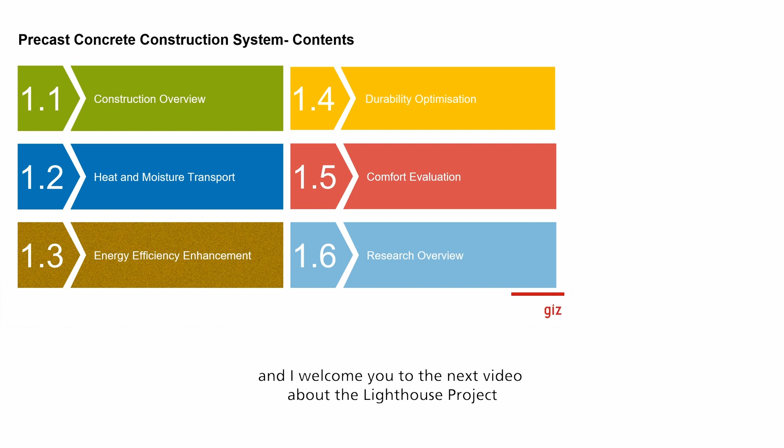Welcome to the next video about the Lighthouse project in Chennai, where we will discuss durability optimization. First, let me come to the basics of durability. What does durability mean, and how can we evaluate the durability? Then later on we will look into the possibilities to really optimize the durability and how to increase the lifetime

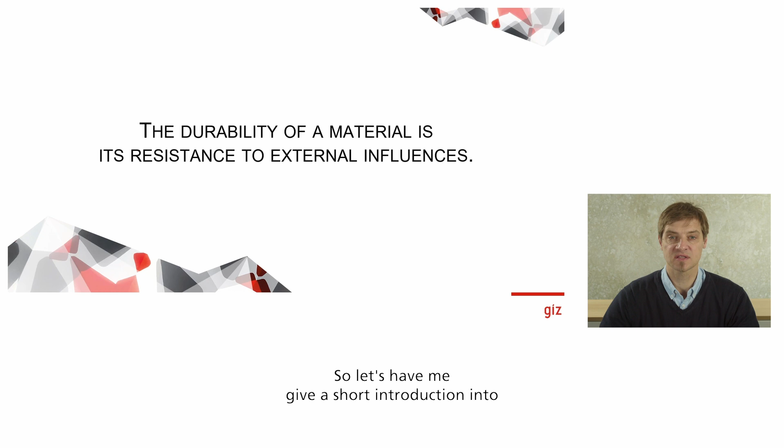of the construction. With that, I would like to start with the first thing about the optimization of the durability, which is the durability itself. Let's look at the influence of the climate on the durability of the construction. When I say we will look at the influence of the climate, I think we have to go one step back and firstly look at the definition of the durability itself. So let me give a short introduction into durability. What is durability?

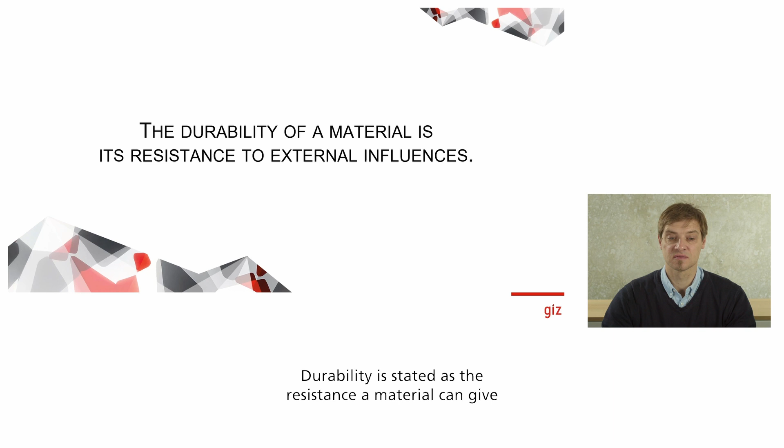Durability is stated as the resistance a material can give to an external influence. And the climate is just one of these external influences, but we will look at this specific influence. So let's have a look at that: the external influence, the climate. As you know, the climate everywhere on Earth is different. So we have to look at the location of our construction site and see what kind of climate is in that area.

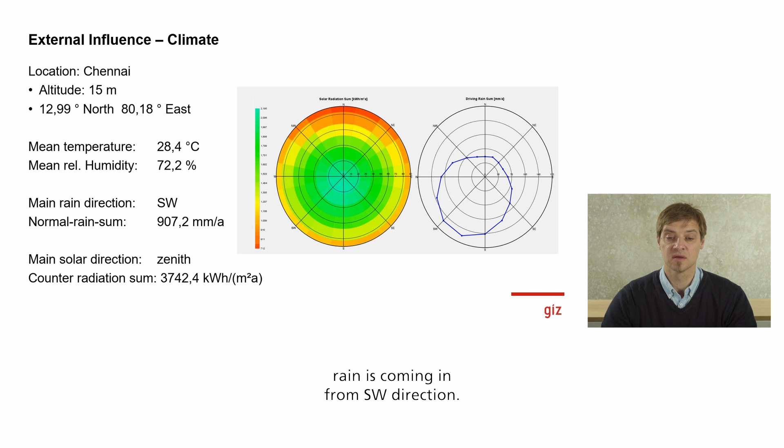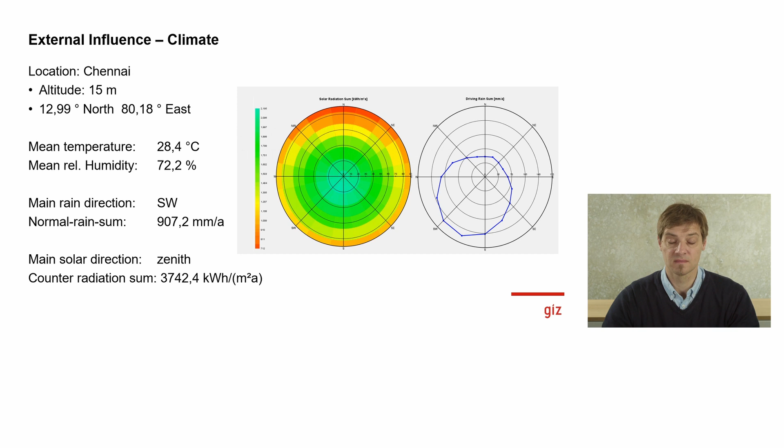On the right hand side you can see the solar radiation, the colorful plot, and from which direction the rain is coming in. The main rain direction is southwest, which means we have to look deeper into this direction especially. The second thing that we have to look at for durability is the material itself, because we said durability is the resistance of the material to the external influences, in our case the climate.

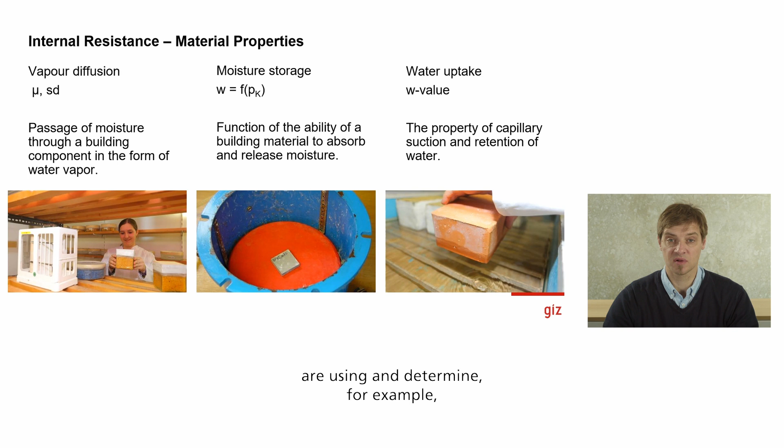The material properties can be determined by lab testing. So we can do a lab test on the material that we are using and determine, for example, the vapor diffusion, the moisture storage, or the water uptake. These material properties are especially for moisture and moisture transport, and also water and water transport within the material, as we know that water is quite a problematic thing in durability. If there is too much water inside a construction, there can be durability loss or resistance loss. If there's too little water in it, the same can happen.

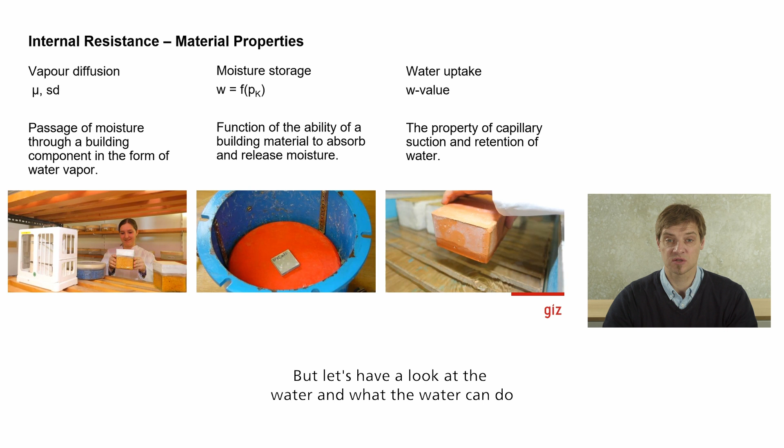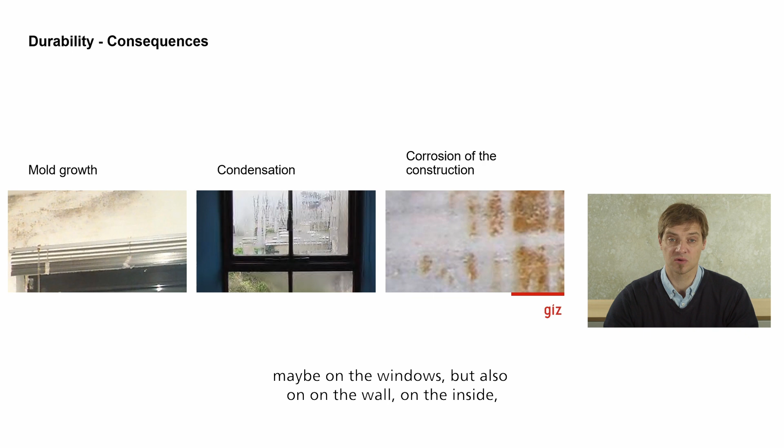But let's have a look at what the water can do within the construction if there's too much of it. The consequences, if we are not looking at that, are, for example, mold growth on the inside surface or sometimes also on the outside surface. We can see condensation on the inside, maybe on the windows, but also on the wall, on the inside but also on the outside. And this can also happen within the construction.

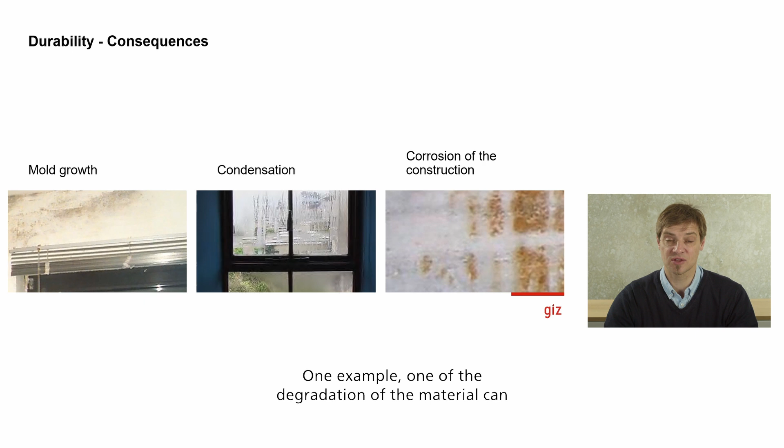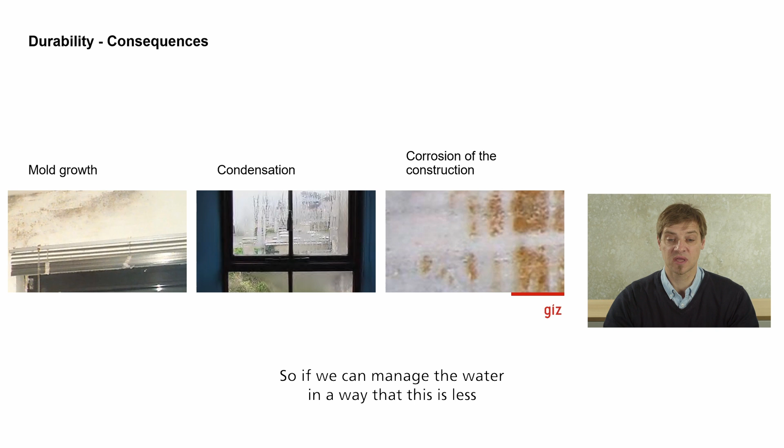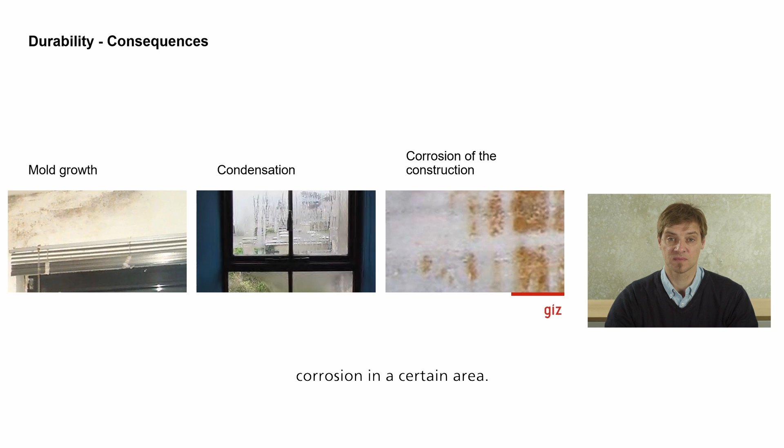If that happens, there is a possibility of degeneration of the material itself, which then leads to lesser durability of the material. One example of the degradation of the material can be corrosion, as you can see in the right hand picture. Corrosion is also introduced by water. So if we can manage the water in a way that it is less applicable to the material, then we also can manage corrosion to a certain extent.

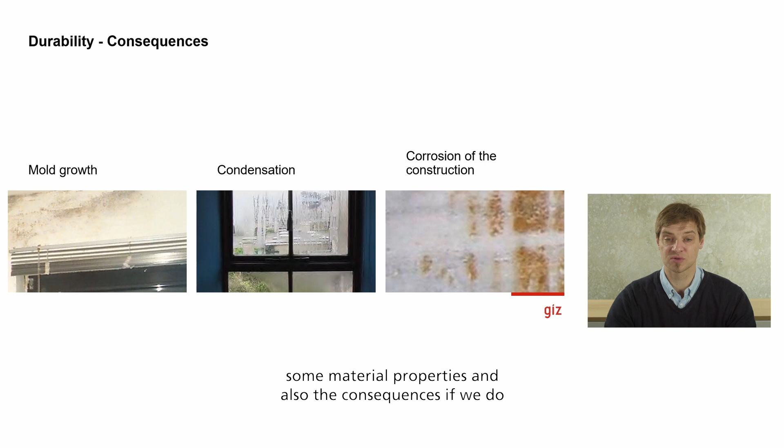So as we have now seen external influence, the climate, the material resistance, some material properties, and also the consequences if we do not look at it, or what can come out of it, the next step then would be to look into the durability evaluation methods. How can we go from the point that we know there is something happening to what is happening there? What can we do? What steps are to be taken?

One of the steps that we are doing is we evaluate the materials and the systems. We can do that in different kinds. We can do that, for example, for fully fledged systems in some kind of field tests. I have provided you a picture of some field tests where you can see different wall types with different insulation, but also different materials, where we introduce these materials to a harsh outdoor weather condition and see what is happening over the years. We measure it and then we recalculate it.

And then on the second step, we also do lab tests for the material itself. So in order to know the material properties, we can look into these materials by measuring them on the different scales in the laboratory. So we gain knowledge about the material and we gain knowledge about the systems in terms of their durability. This is one step, mostly the first step to gain knowledge more about the materials and the systems itself.

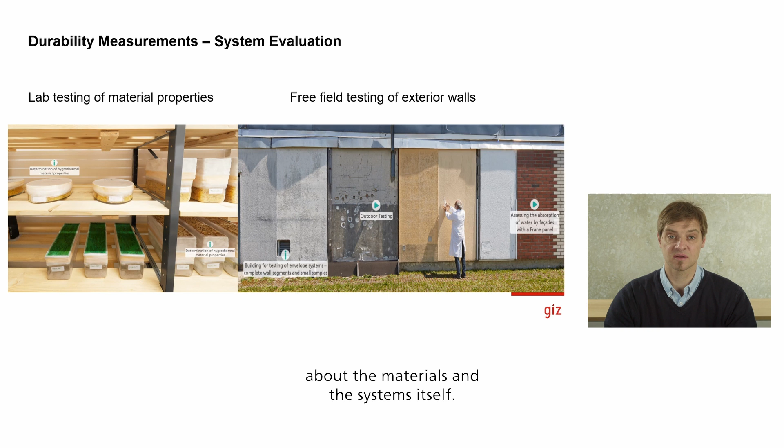The second step then would be to calculate what is happening, because durability is a long-term word. So it's not just for today, and will not look at things which are just from yesterday, but we look at things into the future and we have to pre-calculate what could happen. So what we can do is we can calculate the moisture content within a material, as you can see it on the left-hand side. We can do that by arithmetical evaluations of the durability. This is one method which is very vague, but on the other hand, very fast.

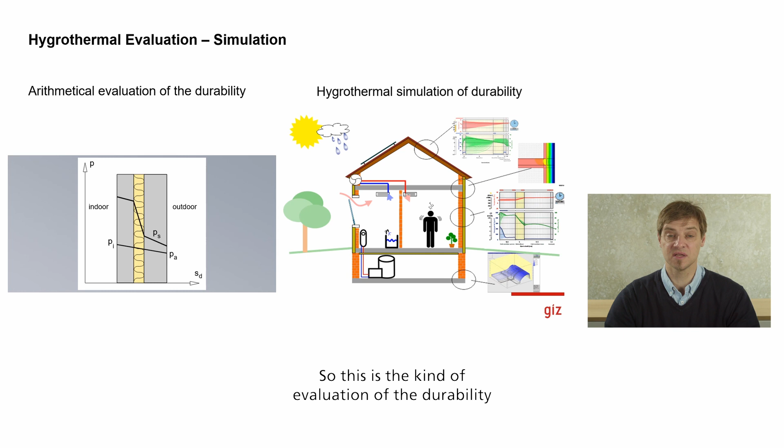And then we can do hygrothermal simulations of the durability. So we can model the system, we can model the material, and we calculate what is happening in the future, what is happening with the moisture in the material. And with that, we can gain knowledge about the moisture content within the material, and we then also can gain knowledge about the durability aspects if we know the model well. So this is the kind of evaluation of the durability through hygrothermal evaluation.

The next step then would be to look into the durability optimization. So we do have some kind of material. In your case, I have looked into the precast concrete construction that you have, and we go into it and look what we can find out using the hygrothermal durability simulation in that and how to optimize that.

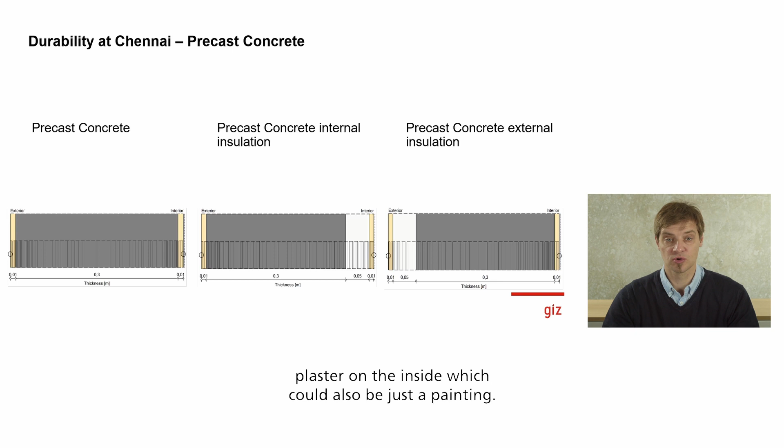First, I would like to show you the first step. So on the left-hand side, on the bottom, you can see a rough graph of the material. So we have on the left-hand side a plaster, we have the concrete block itself, which is the precast concrete, the material you're using with the material properties I have shown you in another video. And then on the right-hand side, we also have a plaster on the inside, which could also be just a painting. And I have then introduced some optimization possibilities.

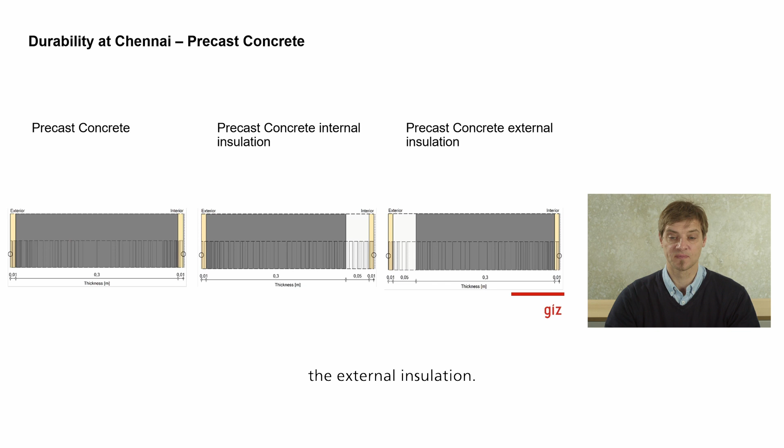We have talked about these possibilities, or we will talk about these possibilities in another video, where it's about the energy efficiency enhancement. So I have introduced an internal or an external insulation, which you can see in the middle, the internal insulation, and on the right, the external insulation. And what I've done now is I've pre-calculated that with the hygrothermal simulation in order to see how the moisture content within that material will be in the beginning and also in the end of the calculation, and I have calculated over 10 years.

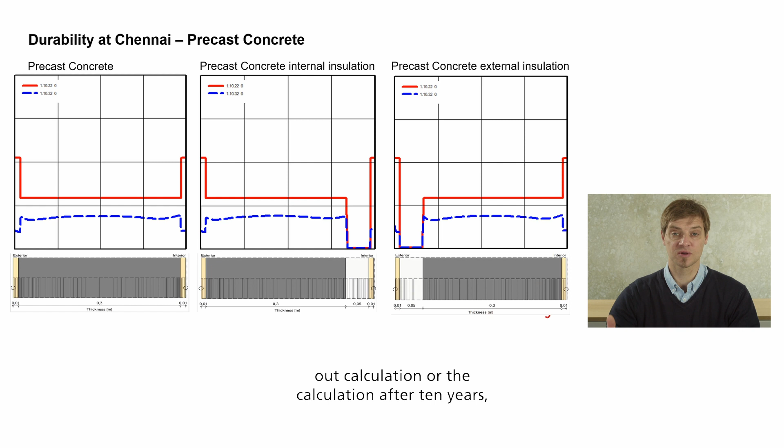And what we see is that in these graphs that are implemented here, the red line always is the starting point. This is normally the basic moisture which is in the construction, which is normal, and it should dry out in some kind. So the blue line, which indicates the dried out calculation or the calculation after 10 years, this blue line should always be below the red line.

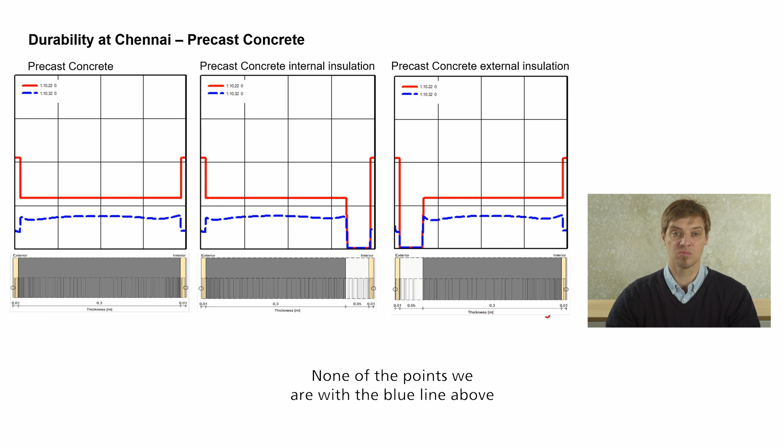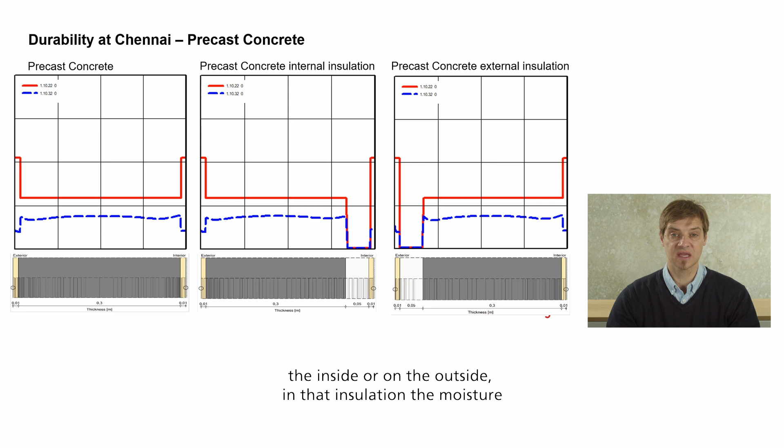If we look at these graphs, we can see that from the left to the right, it's always alike. So on none of the points are we with the blue line above the red line. What we can also see is that by introducing the insulation on the inside or on the outside, in that insulation, the moisture content is quite low.

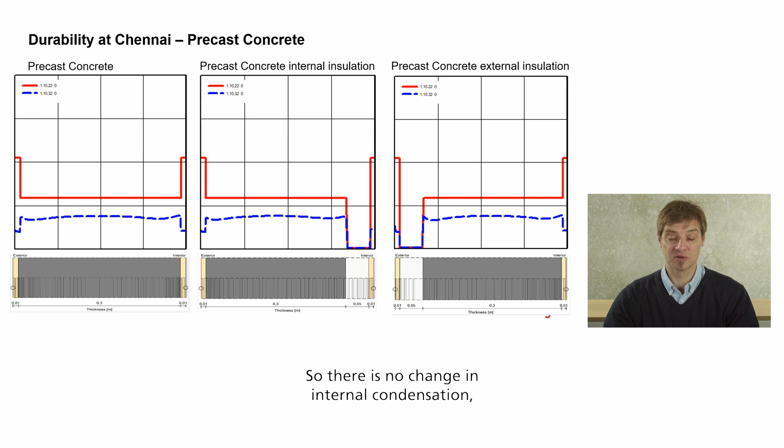But we can also see, if you have a look at the level of that moisture content, it's more or less the same in all the constructions. So there's no change in internal condensation, in internal water content using an internal or an external insulation. So there's no enhancement, you can say, in terms of durability looking at that.

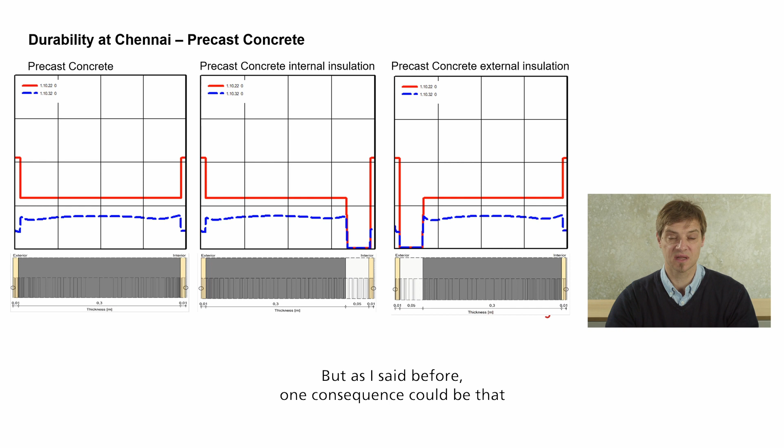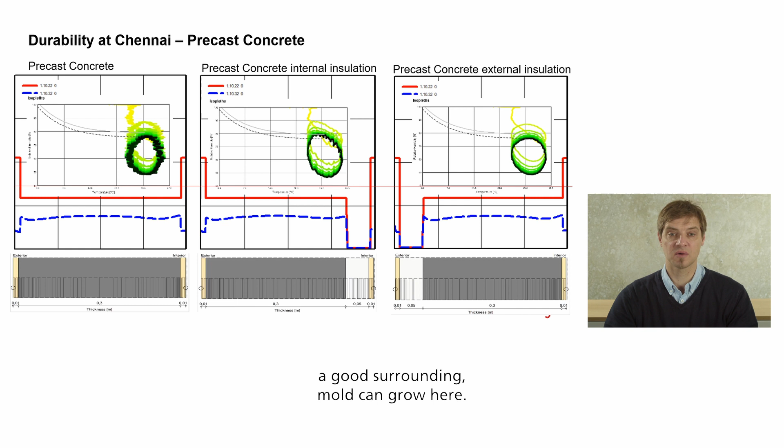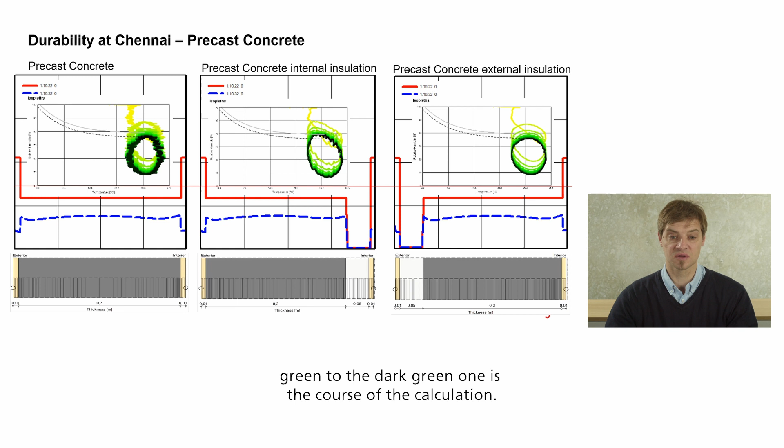And what we see if we calculate out of that measurement and out of the calculation I've done before, these graphs that you can see here, and each dot you can see from the light green to the dark green one is the course of the calculation. So if the light ones are at top and it goes down below that dotted line, everything is fine.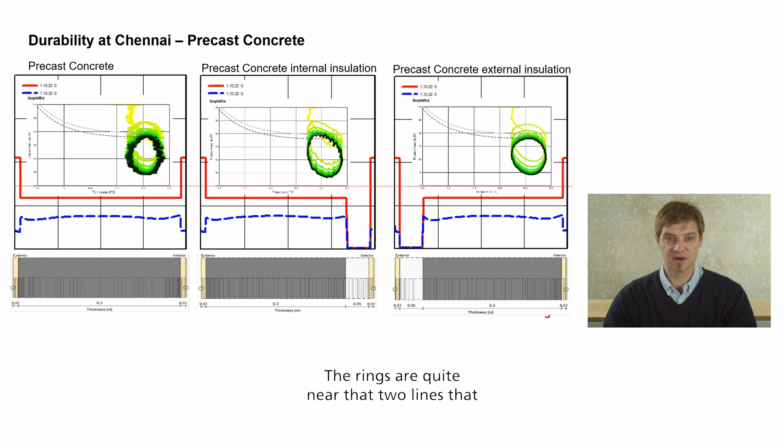And then you can see a circle which is black. This is the final state of that material. So if that final state is good, in the end everything is good, so we do not have to do anything in that area. What we can see is that with all the possibilities, no insulation, internal insulation and external insulation, the rings are quite near the two lines I've described before.

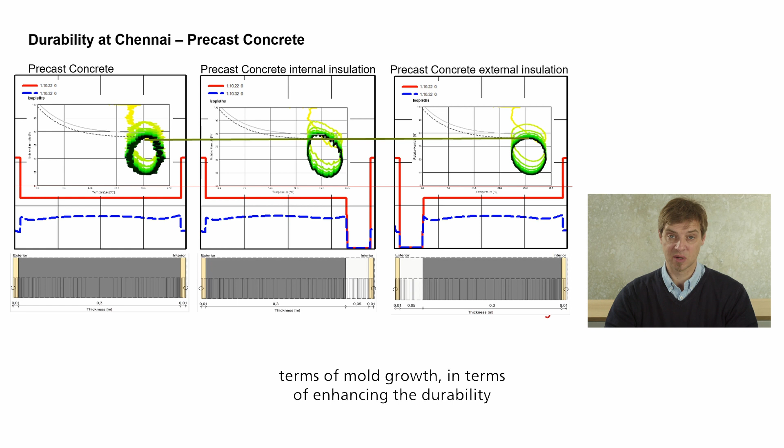If we compare these, and I've done that with this horizontal line, you can see that the best possible thing in terms of mold growth, in terms of enhancing the durability about mold growth, is the right-hand side, because here we are below the dotted line and we have no areas where we are above that dotted line.

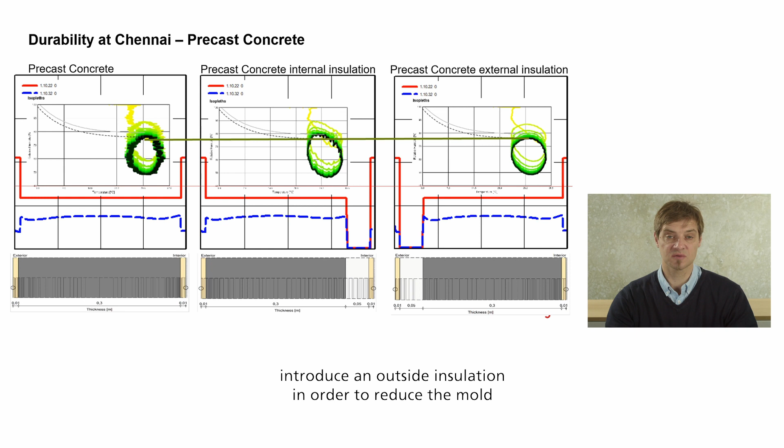So we can say there's no change in that optimization process if we use insulation on the inside or the outside in terms of the moisture content itself, but there is a difference in terms of mold growth potential that we have on the inside surface. So from that we can say optimization could be to introduce an outside insulation in order to reduce the mold growth risk on the concrete itself.

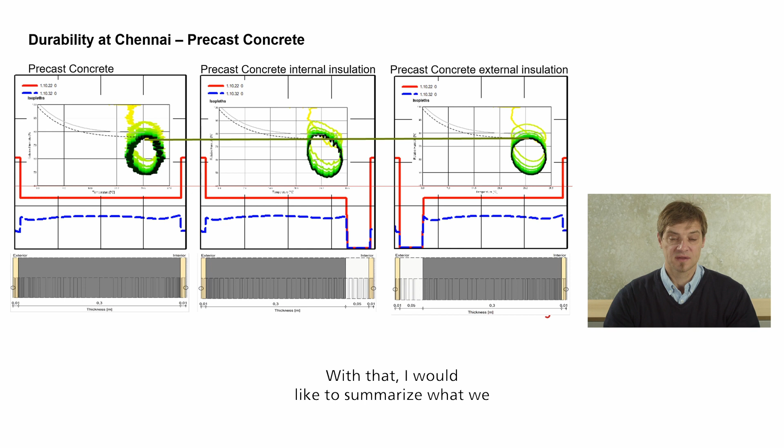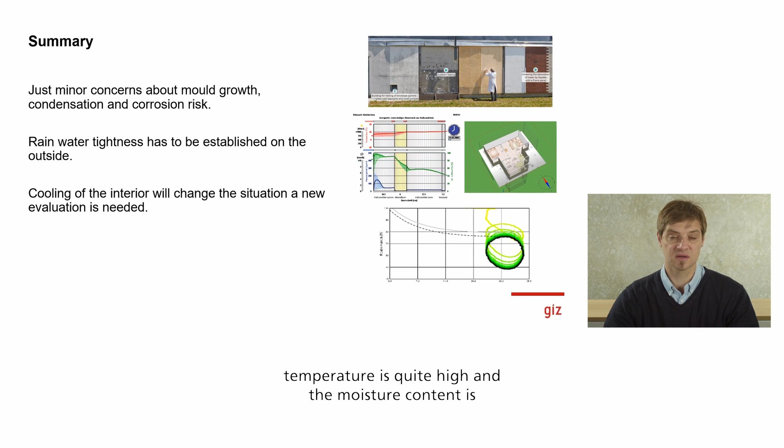With that, I would like to summarize what we have learned today. The one thing is that we have just minor concerns about the mold growth. Every one of these circles I have shown you is about the same. The same is true of the condensation within the construction; all are in the same area and there is no problem. And also in terms of the corrosion risk, because if the temperature is quite high and the moisture content is quite low, there is not too much corrosion risk.

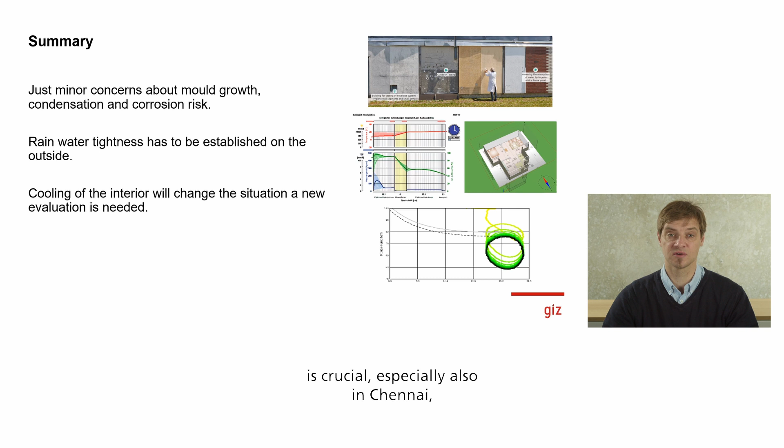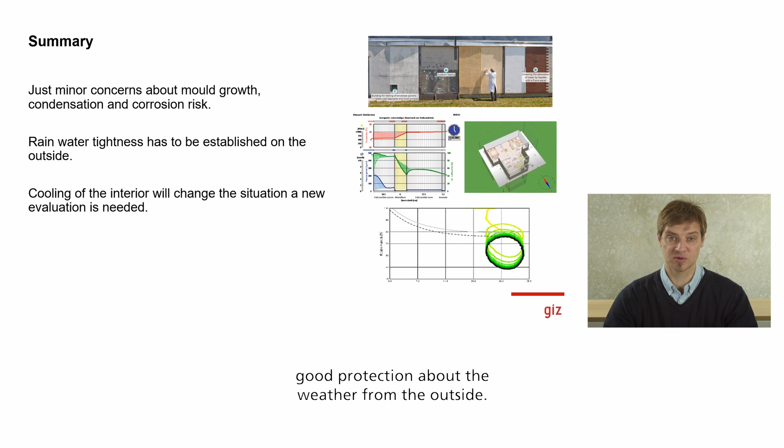But what we have not looked at, but which is crucial, especially in Chennai during the monsoon time, is that the outside has to be quite tight in order to really have good protection against the weather from the outside. And that is the next point.

Because if we change something, for example, we try to cool the interior, the system changes, and therefore also the durability aspects change, and we have to go through the process again, recalculating using the material properties I've shown you, or we have at hand, in order to see what then is the best solution in the end, enhancing the durability.

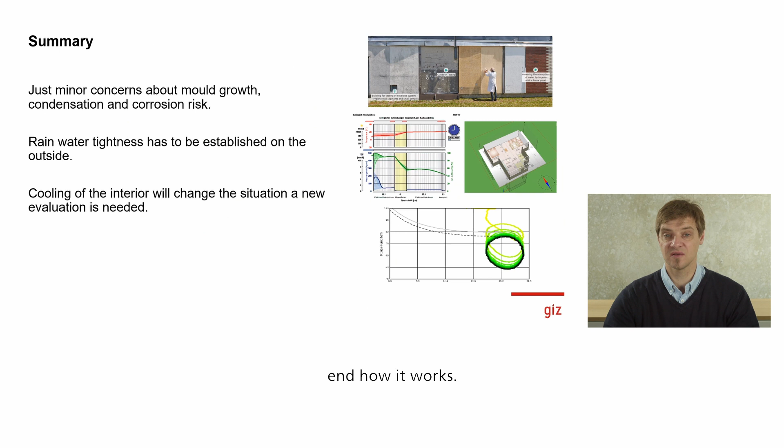So it's not an easy process. First step is, as I've shown you, calculate it, try to look at the condensation within the construction, try to look at the mold growth potential, and then see in the end how it works. And if you change the system, redo all the steps.